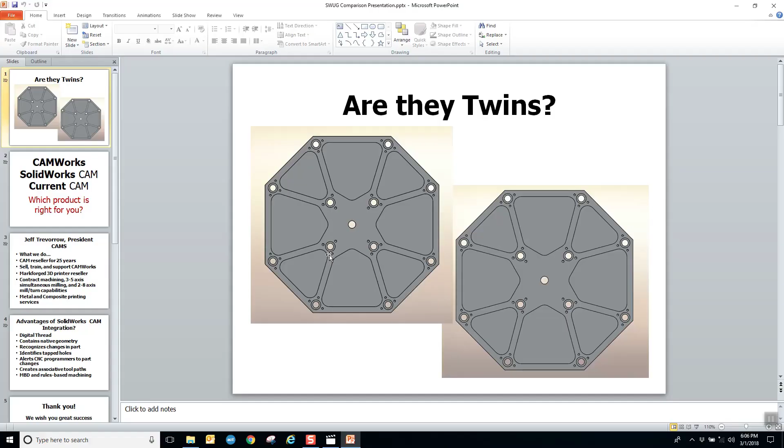All right. Are they twins? So we're going to start with the idea that sometimes things look an awful lot alike in life, and they're not the same. Heard a story over the summer.

A company sent out a part to another company to manufacture, and the part had been changed ever so subtly. These two parts are not the same. One of them has a 15-degree angle. One of them has a 17-degree angle on the pockets here and here. But when the first company made the change, they didn't change the revision number. When the second company got the part, it looked just like the previous part. And so they made the previous part. Over a $10,000 mistake, and both parties split the loss.

But we're going to talk tonight about SOLIDWORKS CAM and CAMWorks, and we're going to talk about the digital thread. And that is the idea that the design intent never leaves the model. Had you made that change to the model, CAMWorks or SOLIDWORKS CAM would have alerted you very quickly and said, hey, your part's changed. Would you like to update your toolpath? And probably would have paid for a couple seats of software, right? With just that one thing.

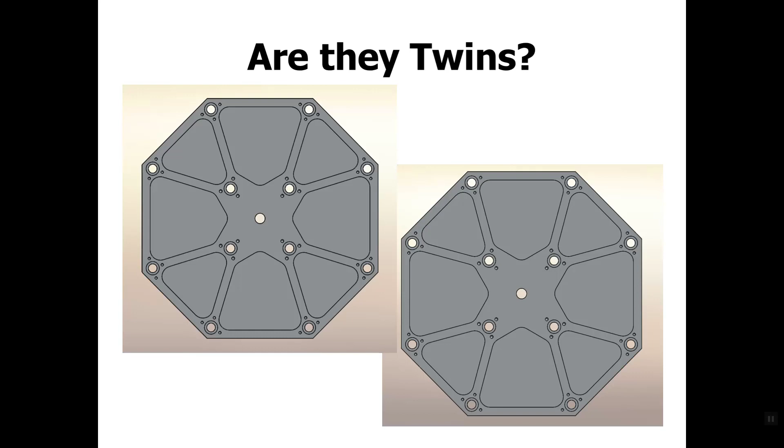So we'll be talking tonight again about CAMWorks, SOLIDWORKS CAM, and your current CAM. I'm not here to convince anybody that drives a Ford to drive a Chevy instead, or anybody that drives a Chevy to drive a Ford. It's really about what tools are best for you guys, and that's what I'm here to talk about.

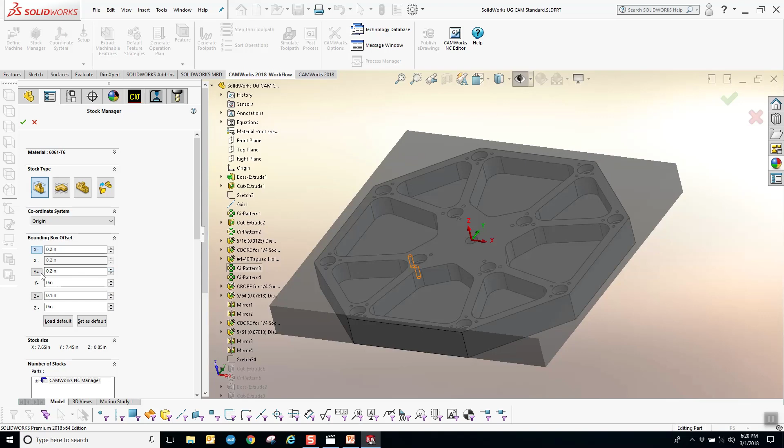So we'll put a little on the top, and then let's put a little on the sides as well. So we got some extra stock in there. Say okay to that. Any of you guys who are machinists, you know that setting our 0 point is going to be really important. So we're going to go in here, and we could use a SOLIDWORKS coordinate system. And you see we've got one in the middle of the part, or we can use a user coordinate system. And we're going to go down here and make a user defined.

And nice thing that SOLIDWORKS actually brought, they said, hey, we like what you've done, but let's make it better. And so they went over here and they said, let's create a coordinate system based on that stock bounding box. And so if you look, you see we got all those little nodes we could grab, and you can grab any one of them and put your 0 point there, or on top, center, or whatever you want to do.

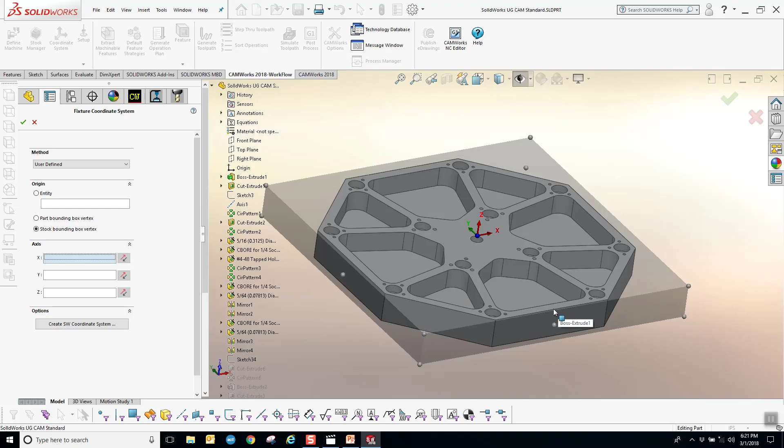And then if you're not happy with the direction or something like that, you can just choose any direction, and it'll set your X along that direction, or set your Y along the next direction, or whatever. So you can grab right off of the model. You can change directions. We could reverse that guy, have him go the other direction or whatever. So let's say okay to that.

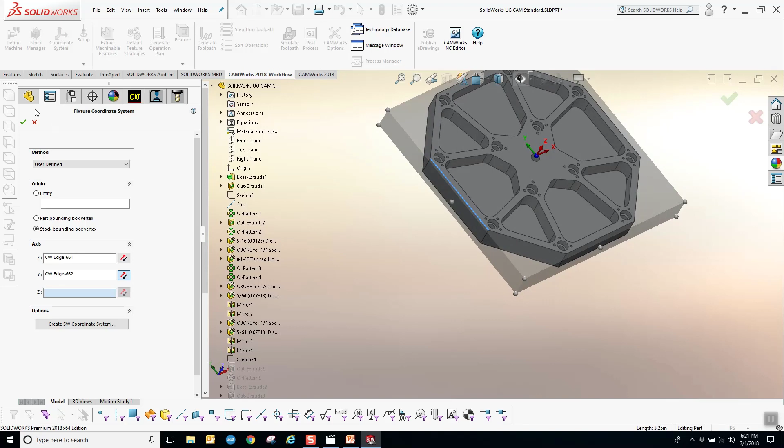And then finally, let's define our machine that we want to cut it on. SOLIDWORKS CAM standard is 2.5 axis milling plus some light 3 axis milling in the part environment only. And so we just go ahead and grab this mill inch, and let's say select and okay to that. Go over here, let's just take this default tool crib or group of tools. We're going to choose the Brian post processor.

So Brian is a guy who works for us. Post processors, who knows what they are? Anybody in here? Who knows that if they're not right, they really stink? All the same people who know what a post processor is. Yeah. Yeah, thank you. Thank you.

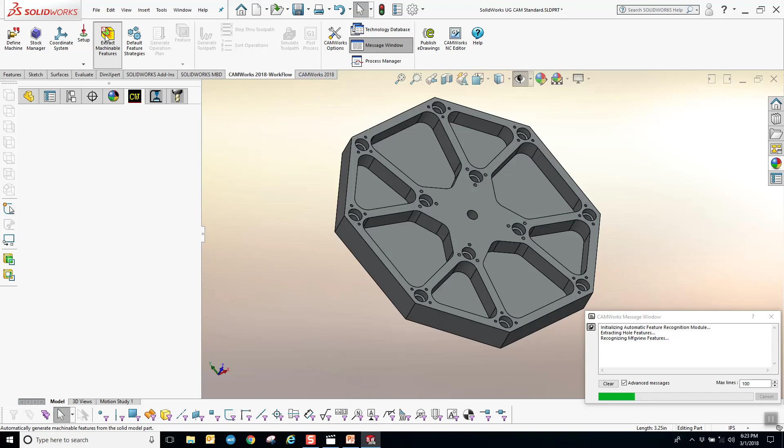And even as I speak now, I know that I got it wrong. I did a little demo for these guys ahead of time, and I was like, I'm going to get this wrong when I go to do it. Because you can turn on your options for the features that are found or not found. It might work because we're in the part mode, not the assembly mode. And it did. So here's what CAMWorks found.

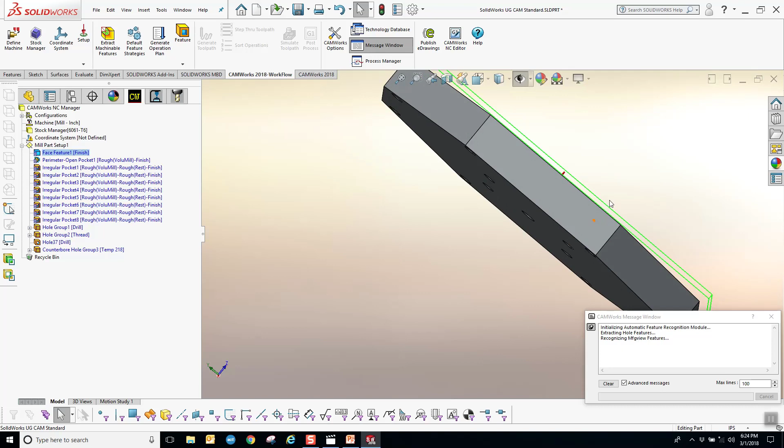It found a face feature. And if you look, it knows where the top of the stock is, knows where the top of the part is. It also knows the extent of the stock. It found a part perimeter feature, and so it knows, once again, where the part is, where the stock is. And we're going to drag that guy down to the bottom. And then it found a whole bunch of pockets, and if we hover over them, you can see them lighting up.

You could tell it to highlight all the recognized features, and they'd all turn blue, or highlight all the unrecognized features. And then it found some holes. And after each of these, you see something in parentheses. So this says rough VoluMill, rough rest, finish. And so you can name your rules anything you want. Like I could make them Jeff 1, Jeff 2, Jeff 3, but after about Jeff 10, I wouldn't remember what they meant. So I try to give them something that's a little bit expressive or that jogs my memory to know what they do.

Every one of you guys who works in a machine shop or runs a machine or anything like that, every company in America has rules. Most people don't capture them. Most people just have the rules, and you know it and you know it, and you have a different set of rules, and you don't care about the rules, and so it's all over the board. This guy's going to run it at 100 inches a minute and this guy's going to run it at 50 inches a minute, and it's all over the board.

And so with rules-based machining, you don't have to conform to them. You can always change them, but we try to give you a starting point. And then every company can refine that starting point: this is how we do pockets. Hey, when we do pockets, we always go in and rough with a big tool. We rest rough with a smaller tool. We finish with a tool, and then we edge break it. That could be a set of rules. But whatever it is, it's just the ability to capture it and apply it over and over again.

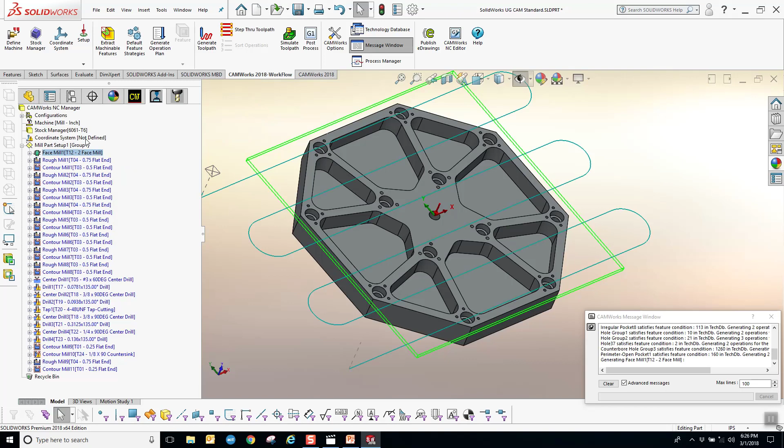Now our operations are blue, and what that tells me is I have no toolpath. So if I go up here, click on that and say generate toolpath, there you get your facing pass across the top and your operation turned black. If I look at my tool tab, here's all the tools that I'm using in black and all the tools I'm not using in blue. So let's just go ahead over here and say generate toolpath for everything.

Now is this generating the toolpath based on your rules predefined already? Yeah, based on that. And you know what? The truth is that I just did something that I didn't intend to do on the SOLIDWORKS standard demo. So you'll see that it says volume mill. Who knows what volume mill is? So a few of you guys. Volume mill, so truth is, I used to tell people this.

If you bought $5,000 CAMWorks, and back then it was about the $1,800 volume mill add-on, you'd be at about $6,800, and I'd say the volume mill can probably pay for the whole system in the first 3 to 6 months. Volume mill is a volumetric, high efficiency, ultra high efficiency roughing algorithm. It's only for roughing. You got to have some RPM and some feed rates on your machine to make it worthwhile. But if you do, then you can expect 2 to 5 times faster roughing cycles. You could expect 3 to 8 times better tool life.

My first customer who bought it made a 65% profit on their first job. He called me up. He's like, I hope you don't sell that to anyone else. And so we did, we sold it to a lot of other people. But that was amazing. And I had another guy buy it recently. He was cutting Inconel, and it was taking him 1 hour to rough the part, and he was getting 1 part per tool. Volume mill, 15 minutes. And he still only got 1 part per tool. I don't know why, but he probably was like, I'm saving enough money, I don't care, I'll put a new tool in there. So it's for real.

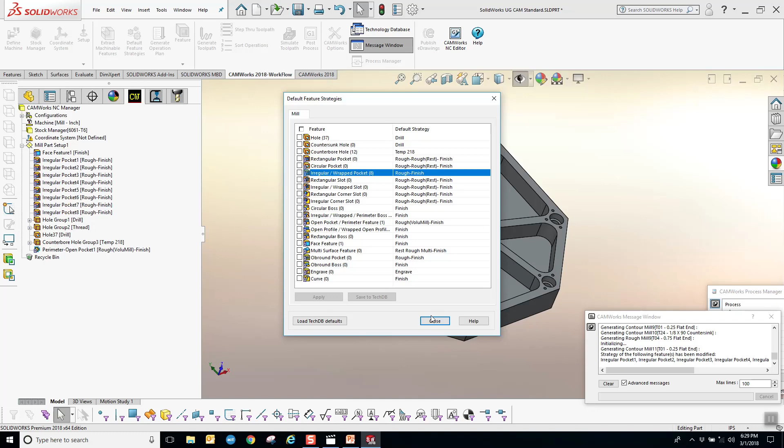What's that? Oh yeah, way better than the old way where you had to go through click, change, click, change. We do learn—it takes us a while, but we do learn.

So let's regenerate our operation plans. We have a choice of updating or regenerating—let's just regenerate everything.

This is the slowest fast computer I've ever owned. So let's go ahead and generate a toolpath for everything.

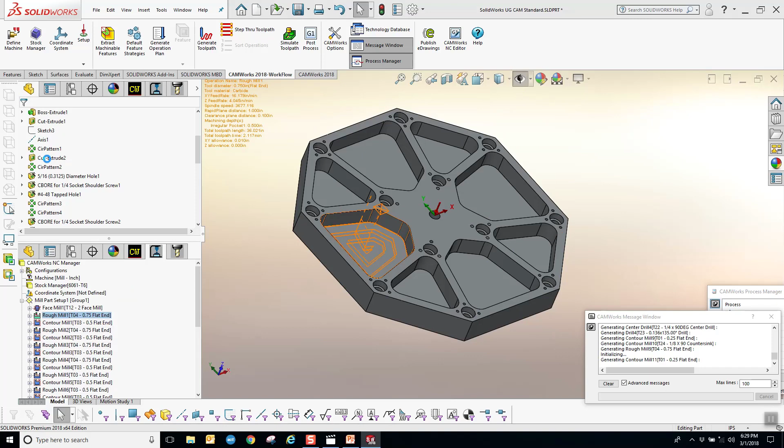Right about now, there should be a whole group of guys going, it's way too automatic—where's the control, right? But you can double click on the operation, and here's all your standard parameters. We could go in and change the tool, grab it from our tool crib, change the holder, change our protrusion amounts, probably change the overall length of that tool.

And I can't stress enough, it's really all the standard questions you're used to with any other CAM system. Feeds and speeds, they can be based on a library that you can set up per operation or per tool.

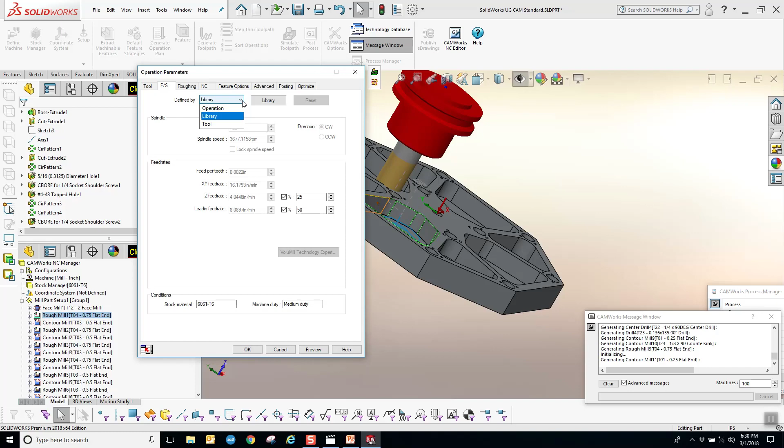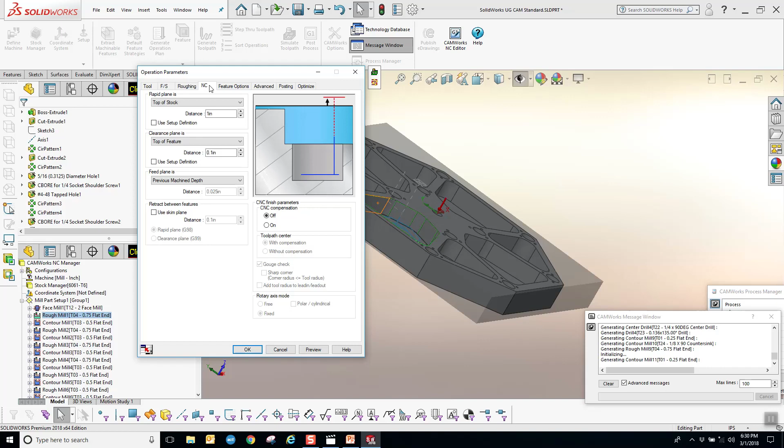Your style of roughing—do you want to pocket in, pocket out, zigzag, spiral in, spiral out, offset roughing, or if you upgrade, volume mill. Then the NC tab: what's your clearance plane, your rapid plane, what are they relative to? It's just all the same things you're used to seeing.

How do you get into the pocket? You know, spiral in, plunge in, entry drill, all kinds of things.

Yes, a quick question for you. In other software, if you don't set your rapid plane higher than say the top of your part, it goes right to the top of your part. Is this because it's a solid and the system knows not to do that?

No. It's because our rules were set up so that we didn't do that. If we had somehow set them up wrong, of course your simulation would show you that and you could get a nice crash—you could pause it, do whatever, probably put a sound on it. But it's because we set the rules up that said rapid planes above the top of the stock, and clearance plane above the top of the feature. You don't have to worry about it, as long as it's true.

So I was at Gentex today and they said we are this close to having all our standard stuff automated—just push a button.

Another one of our customers is PCS Company, a division of Misumi. PCS owns 35 seats of the most popular CAM system in Michigan—most of you probably know what that is. It's a great CAM system, but with 8 programmers, 2 shifts, and 35 seats, their programming time was down to 60 minutes, or 1 hour, per part.

They bought 2 seats of CAMWorks, 2 programmers, and put about 6 months of refinement in because they're really trying to automate their whole system. We even wrote something called a color-based macro—one of the guys from Precision Aerospace wrote it. He's a genius, one of my favorite guys in the world. PCS Company today is down to 15 minutes per part.

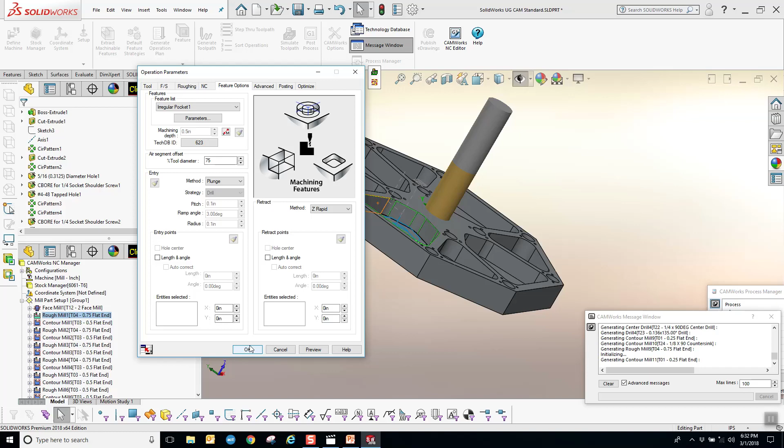So anyway, let's say okay to that, and we'll change that tool for everything that's using it.

Let's go over here and sort our operations. So we could come over here, and if we had indexes, we could sort by and across indexes.

Tim Vandertoorn from Envision—they got a beautiful new Makino horizontal over there. If you guys are looking for some fast horizontal work, they'll do a great job for you. I was asking him today how it's working for him, and he said great.

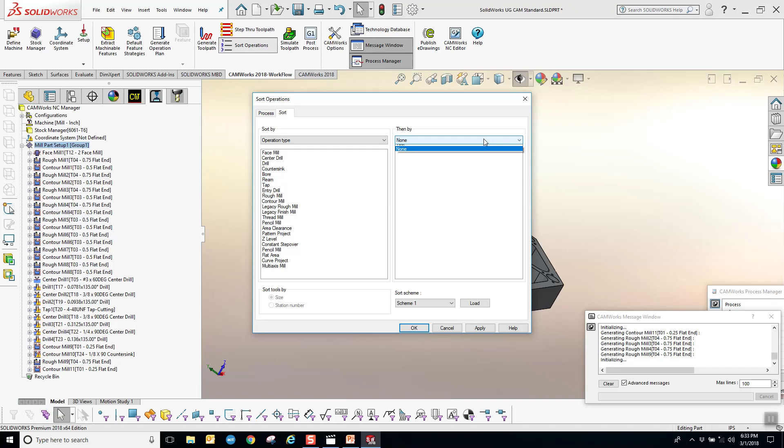You know, for optimization, you can sort by index, sort by tool change, sort across indexes, things like that. And then we can tell it what we want to do first - do we want to do our hole work first, then our milling, or vice versa? We also want to sort it by tool, and we can apply that. If we like it, we can say okay. If we don't like it, we can undo it.

And then you can still drag and drop. So if we want to do our... oh, I forgot to take my volume mill off of that. Sorry, you're going to get to see a little volume mill. Didn't mean for you to.

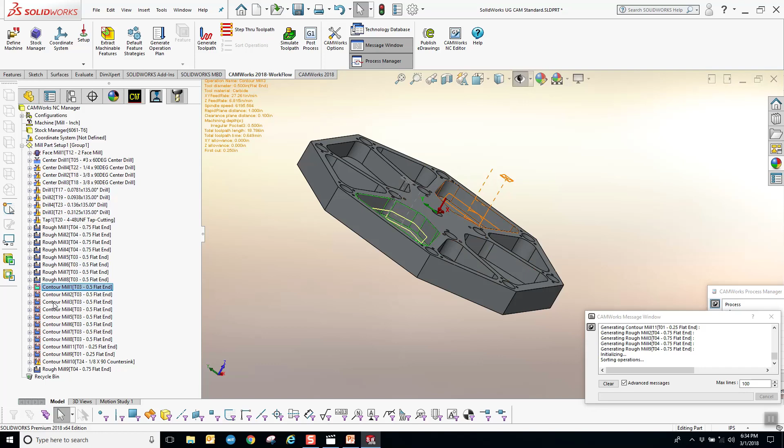And let me find that contour pass, and let's take that guy and drag him down after the rough. Now I can tell already that I'm not going to like this contour pass because the rules in there have defined the depth of cut and things like that, so I know the tool is going to be too small. But let's go ahead and run the simulation first, and then we'll go through that.

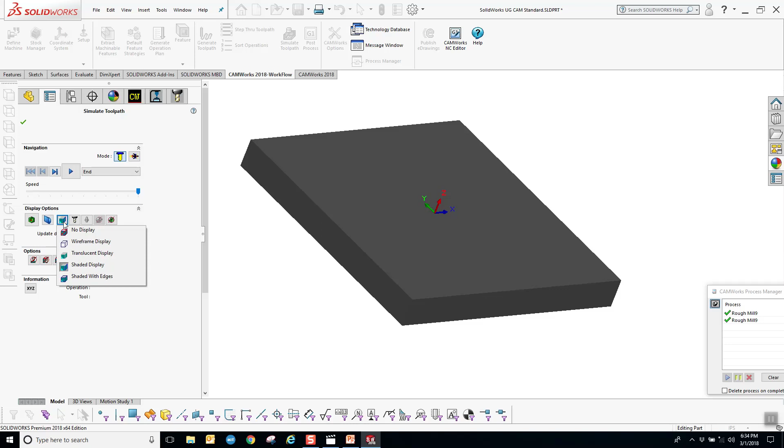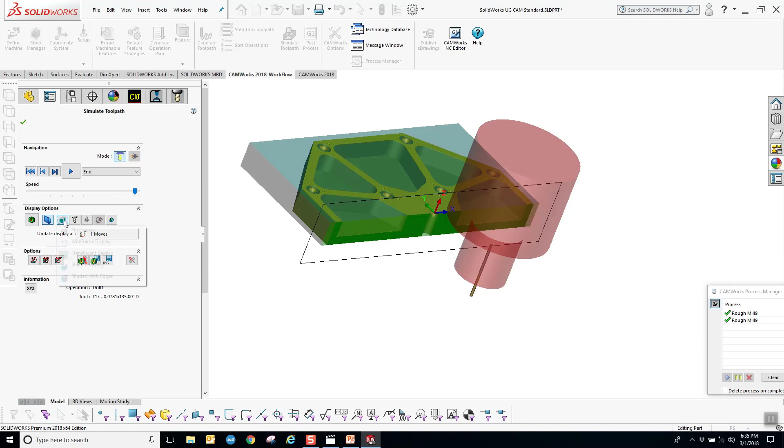So you can make the stock solid or translucent or whatever you want to do. You can show the shaded part underneath if you prefer that. Whatever you want to do. We'll go ahead and slow it down just a touch. When the tool is red, it's doing a rapid move, and when the tool is gold-colored, it's doing a feed move. Now I usually like to show the stock as solid - whoops, I don't want to do that. So we'll turn the part off.

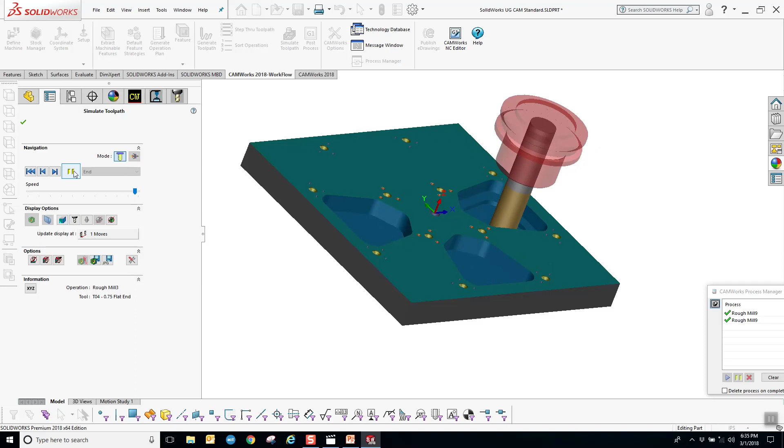And this is more my favorite way to show it. Let's see how we're doing on time. Some of this part had 4-48 tapped holes in there. It automatically saw that with the thread recognition and things like that, so it automatically did that procedure for us.

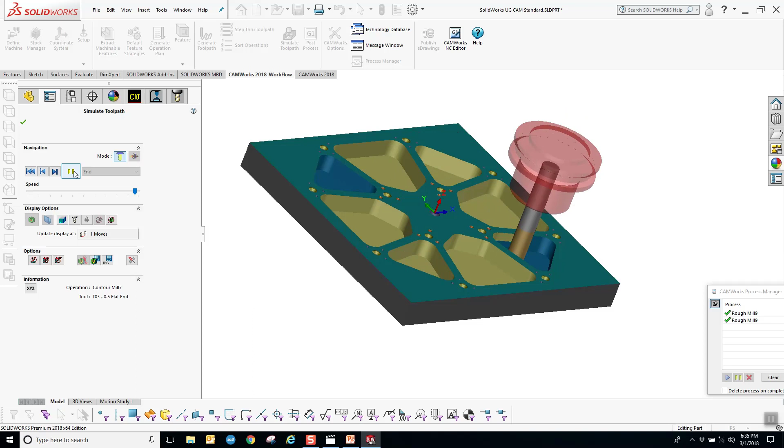And we can combine these operations, so we take like operations - you don't want to have to change 8 operations to do the same thing. So we can combine them, and when you do, it'll automatically sort that flow of cutting too, so you're going from closest to closest.

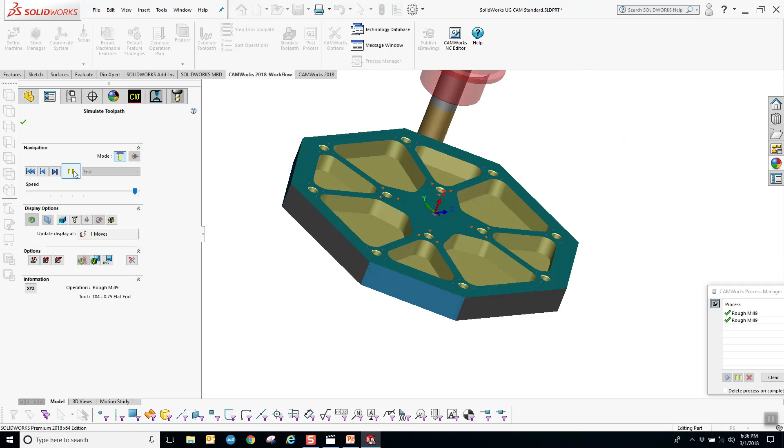Now here's the volume mill. It's doing chip thinning going into the cut, chip thinning coming out of the cut, constantly varying the feed rate in order to keep a constant volume of material removal. And then what it wants to do is a racetrack toolpath like this. And then there's our too small tool - I left it too small for a reason, I wanted you to see it.

So how do you change tools? You could go into the operation and choose the tool that you want, or you could just come over here and say, oh, there's that 1/4-inch tool, I'd really rather use my 1/2-inch tool. So you can grab it and drag it down to your 1/2-inch, it recalculates your tool path, and away you go.

Let's go and combine those operations. Actually, maybe we won't - I'm going to do almost this identical part in the Pro demo, which we're going to do next, so I feel like it's going to be kind of redundant, but I just wanted to show you some of the differences. Let's go ahead and post the code out.

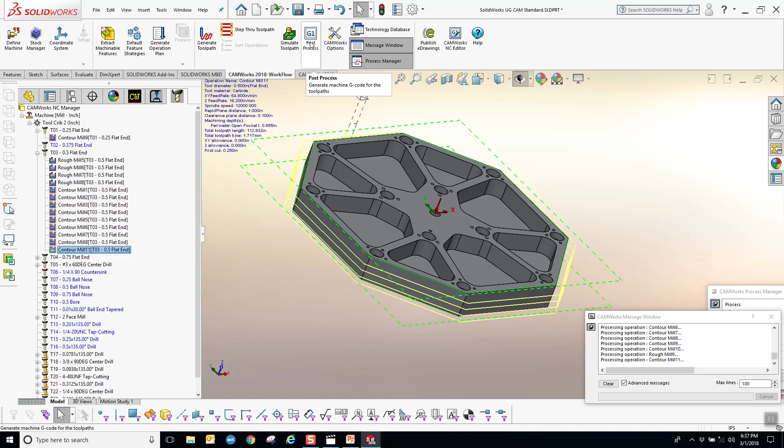Let's put it under G-code, and let's have it run - open up the code in the editor when we're done. And you can have it show the code or not show the code. We'll just let it show the code.

And you can kind of see it scrolling by there. You could also show the moves - that's fun for about half a second, and then you don't want to see it anymore.

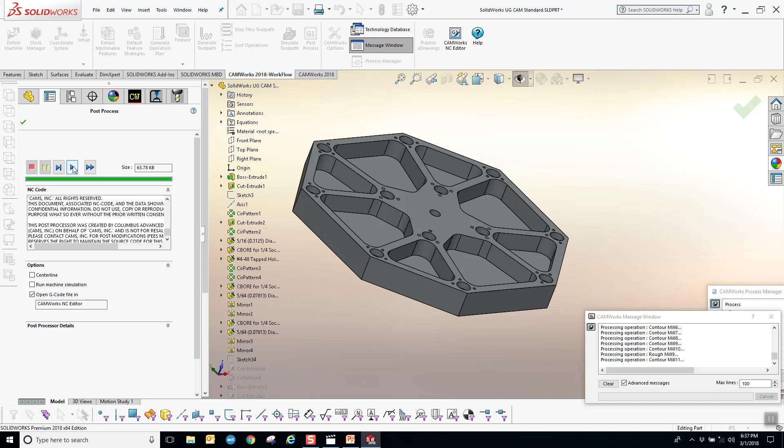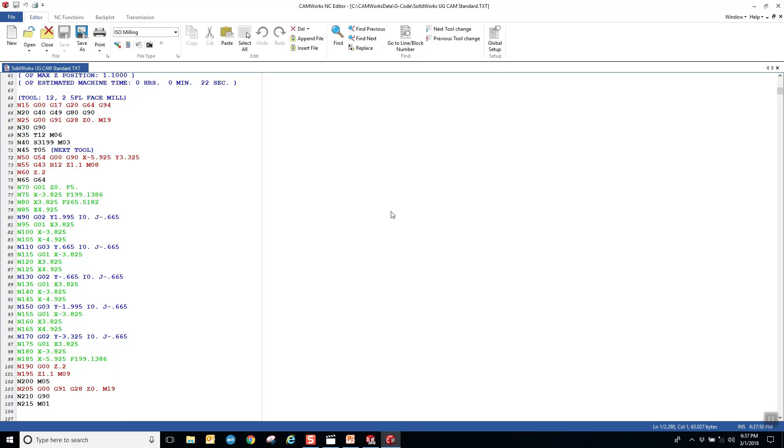And then here's the editor - this is the CIMCO Editor. A lot of you guys have probably seen it, where it shows you the different colors and things like that. It's kind of a light version of it. It's got some backplotting and stuff in it. You can get a pretty inexpensive upgrade - you even see some solid simulation through G-code, which is nice.

Any questions on that so far? When you say the solid simulators, that's like Vericut, basically?

That's a great question. We actually have 3 levels of machine simulation. Most people are doing apt-CL based simulation. We have that - it's great if your post is perfect, and if your post is not perfect, you could still get a crash. We also have G-code level simulation for CAMWorks with our virtual machine, and then just the cut simulation you saw before.

We're also personally carrying the CIMCO line of simulators that are just coming out. Vericut is great software, very expensive - you spend 30 grand in a heartbeat. CIMCO is going to be probably under 3 grand, probably under 2 grand in some cases for true G-code machine simulation. That's unheard of. Ours is more than that.

Is that drawing the whole machine or just your screen? Yeah, you can. They're starting with Heidenhain, I believe, because they're from the Netherlands, and it's very popular in the area. But they're going to do all of them, and they're really bringing the price point down. Same machine models as any of us use - same models I'd use for CAMWorks, for Vericut, for anybody. So the models look the same, then you just got to get the kinematics. It's kind of the reverse post-processor, right?

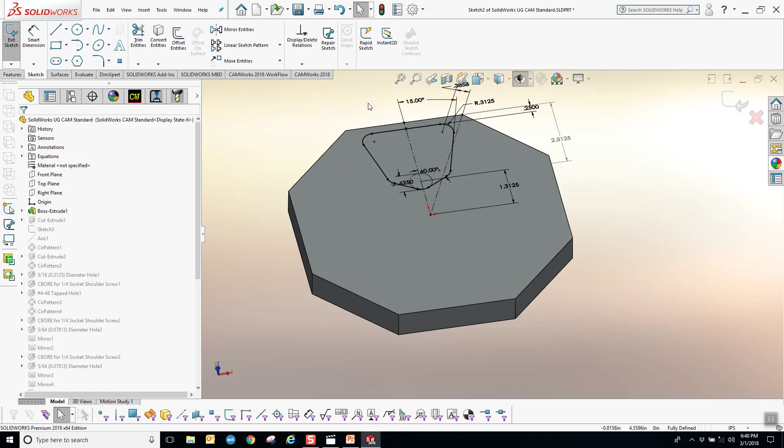Let's go and edit the sketch that was used for this cut pocket. Let's go in here and just change that angle - let's make it a 19-degree angle. So you see it kind of narrow up. Let's exit out of our sketch.

This propagates that change - you can kind of see how these guys got longer. Maybe you can tell that. And this is the magic right here, CAMWorks - you get this message. That's the $12,000 message right there. That is, hey, wait a minute, the part changed. So we say okay, let it go ahead and rebuild.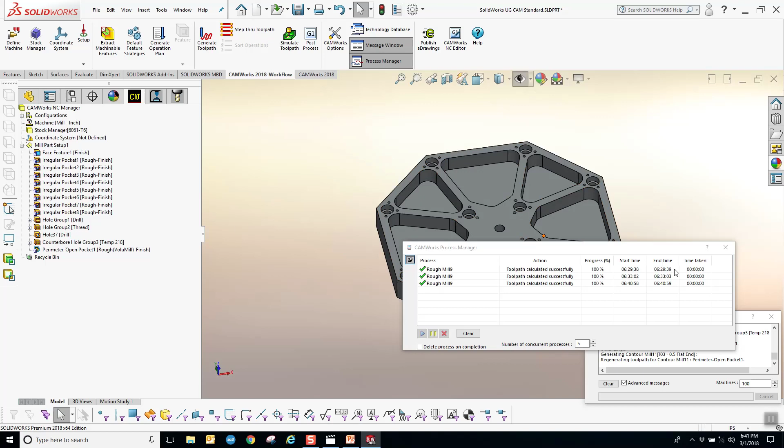I'll show you one other quick thing, we'll run a quick simulation again. This is all standard, right? The only thing that's not in standard is the volume mill outside roughing - I didn't change that back, so let's get rid of it. I'm going to turn this guy off so it doesn't stay up, and get rid of this guy too.

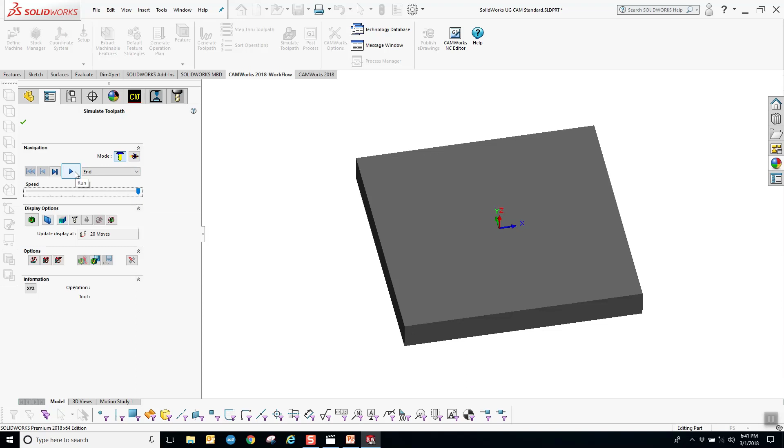Let's go into our simulation. Even in tool mode, we can go here and say, hey, update the stock every, let's say every 20 moves, and then we'll just have it run to the end. Let's set it on full speed. So pretty quick, and then you can do a comparison between the modeled part and the cut part.

Looks like we got a little extra stock left on our counterbore holes we'd want to address, but otherwise our pockets are correct. So it updated the toolpath to correspond with the change in our pocket.

Can you put in your post toolware, you need to just rerun a pocket or whatever? Yeah, so if you're talking about probing, that's something we have a little bit today, more coming. If you were talking about probing a pocket and then rerunning based on the probe data, that's not something we could probably do today. I mean, we could - I just bought machines and bought Renishaw probes for all of them, and bought the Renishaw software. So we're going to figure out what's the best way to integrate that with what we have today.

But CAMWorks is also working on this - the truth is some of you guys have probing routines in your CAM software today, and when you go into the probing routine, it's like you just went into a whole new house, right? No, but what I'm saying is, let's say I measure that pocket and it's supposed to be a 3/8 counterbore, plus or minus .001.

Can I rerun just that toolpath while it's already posted to the machine to get my tool to fit, or do I have to go back into the post and line up my tool or whatever I have to do to get it to fit? Well, that's more a machine tool thing, right? Because if you have the probing, you had the machine go probe it, and then it found that it's undersized. If you're oversized, you're done, right? But they found it's undersized, so I have to run it again.

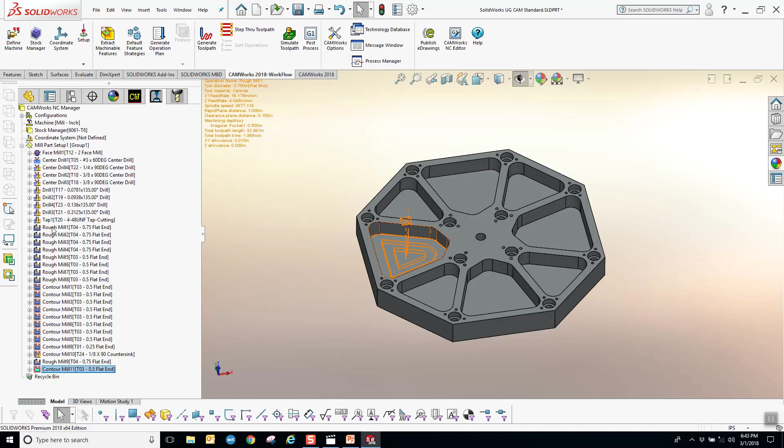If I had 40 programs posted out, can I go to tool 20, operation pocket 1 or whatever, and just rerun that pocket? If it's already posted, can I just rerun that? Can I go right in my post right now, go T20, and just comp my wear myself manually and rerun that? Depends on your machine controls. But some posts don't read wear.

Well, normally for us, it's more on the machine side at that point. We just did a Roeders post. You guys know the Roeders machine? That machine checks the wear and it substitutes out the tool. If your half-inch tool's got too much wear on it, it'll just put the next half-inch tool in and rerun. Yes, we have that for the Roeders.

Even for a regular Haas or whatever, it's not for tool wear. I don't know how tool wear is posted out. Well, it doesn't post tool wear, so we're going to give you your comps. We'll put out your cutter comp. It turns cutter comp on or off, so the comp of the machine does it for you. And we'll call it whatever comp register number you want.

We can work with you on it. I think we're close. We're just running a lot of stainless. If it's a long run, we may have to run that one pocket 2 or 3 times, and we don't want to change the tool because it's still good enough. Being able to comp that tool 2 or 3 thousandths in the machine and run it again. And I just don't remember the post for tool wear or cutter comp.

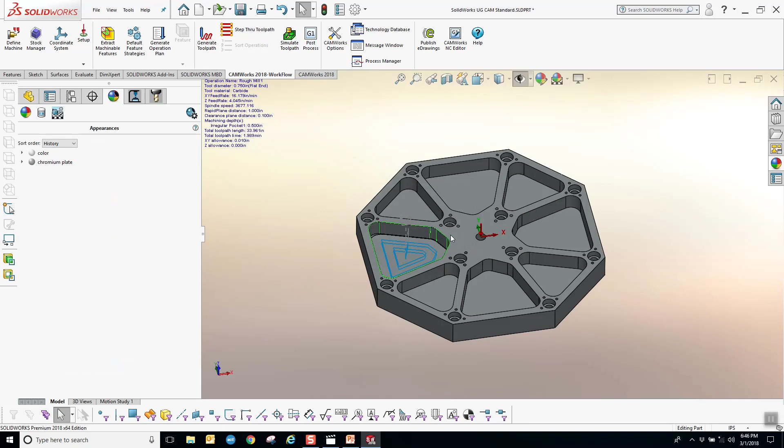I've got about 450 customers and thousands of machine tools that we're running, so I feel comfortable that we can help you get what you need. All right, let's look at this part. What would the differences be if we went into Pro? I'm going to keep the same part just so it keeps some familiarity, but let's grab it in the assembly environment.

So in the assembly environment, we've got a whole bunch of solid models in here. Let's just move real quickly through that part programming process again, because I want to show you guys just a couple other things before I'm done. Let's go. We'll do a new configuration on this guy. And so the first thing we'd do is we'd come in here and we'd say manage parts. And so we'd want to let the system know what's a part and what's not a part, right?

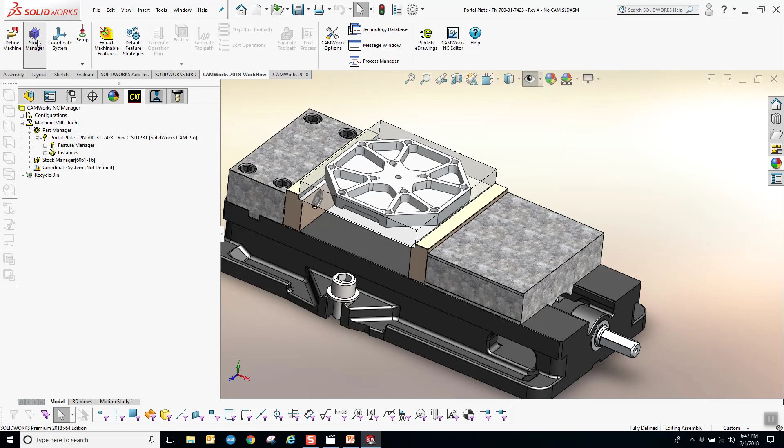And then the next thing we're going to do is we're going to go define our stock. And in this case, we'll just choose another solid model. So we choose that guy and it maps the stock out onto that piece. So we'll say okay to that. Let's look at our rules real quick here.

So for our CAMWorks options on our features, we're going to look for holes, non-holes, bosses, face features, part perimeter features. And when we find a part perimeter, we're going to treat it as an open pocket, which means it's going to machine all the material away rather than just cut around it. And we're going to say anything up to 1.25 inches can be drilled. Anything over 1.25 inches we want to mill.

And let's say that we have to have 91 degrees of an arc before we treat it as a hole. And then we're going to condense split holes. So if we have a hole that is collinear or whatever, that goes here but has a break here and goes here, we're going to drill that all as one hole, and we'll recognize it that way. I think that should be good. So let's say okay to that.

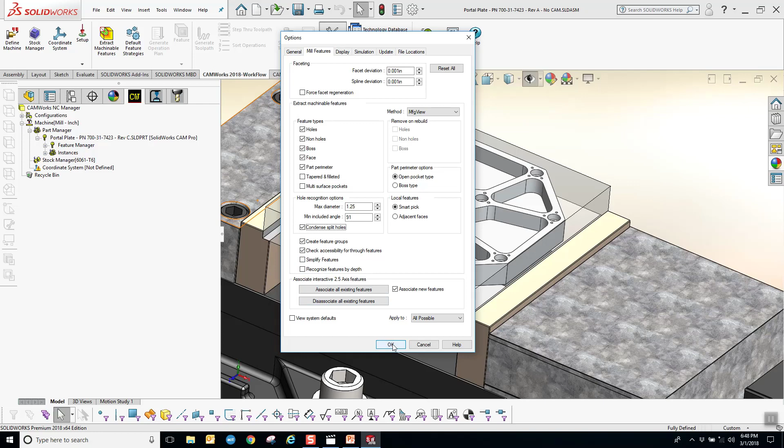And let's go over here. Let's create our coordinate system. And let's put it based on the stock. Let's put it right there. Let's make our x-axis along this edge here. And let's make our y-axis along this edge here. Let's reverse that guy. Or actually, let's reverse this guy, rather. There we go. Say okay to that.

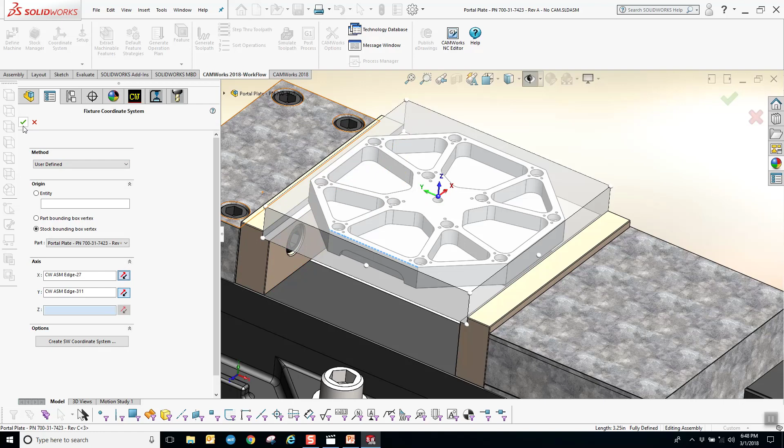And once again, I want to stress that you can use the CAMWorks, SOLIDWORKS CAM coordinate systems, or you can use your SOLIDWORKS coordinate systems, either one. And let's go into our machining environment. This time we're going to take our 5-axis mill. So let's select that guy. Let's go over here. We'll take that same tool crib. Let's go over here and take our 5-axis post.

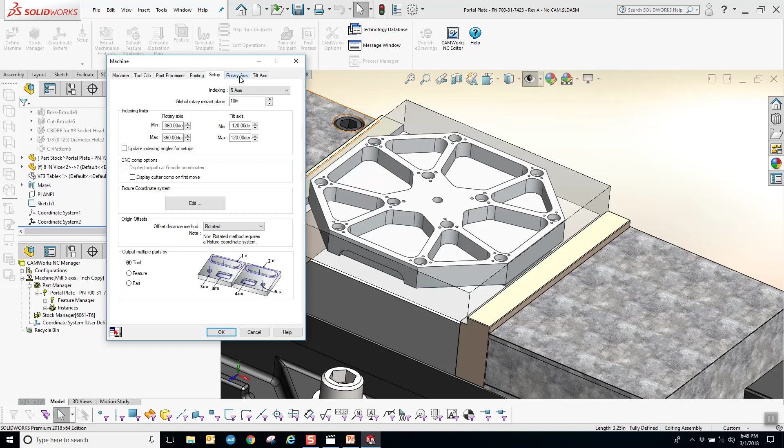And let's make sure that we've got our 5-axis mill, and we're saying that we can rotate 360 degrees, we can tilt plus or minus 120, and you can set those limits up for your own machine. And we're going to be rotating about Z. And on this machine, we're going to use a head table machine. So like some of the Moris or the Hurcos have them, where the head swings. So let's go about our Y-axis, and let's reverse that direction, and let's say okay to that.

And then the system is smart enough to know that when we extract the machinable features, it's going to give us the things that are accessible. And so let's go ahead and we'll say extract machinable features. I'm going to try to go really fast on this because there are a few other things I want to show you guys, and we only have about 10 minutes left. So let's drag that guy down last.

Here on the side, we found a face feature, and I don't really want to use the face feature, so I'm going to delete that guy out of there. We found a part perimeter feature. I don't want to use that. You can also control select the things you don't want to keep, hit the delete button, get rid of them.

And normally I would come in here and I'd kind of rough off this material and I'd create a feature, but I think we're going to run out of time for doing that, so I may just let it go by itself. It'll look a little funky, but you'll get the idea. And so let's go ahead and generate operation plans for everything. And let's go ahead and generate toolpath for everything.

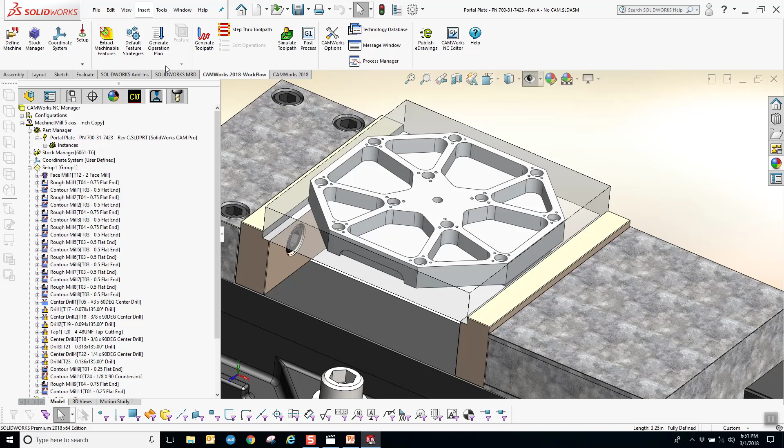Now, I'm going to go ahead and I'm going to sort operations real quickly. And then I'm also going to condense. So I've got, here's my outside rough, and then here's all my different pockets. And you can see it's rough mill 1 down through rough mill 8. So I'm going to shift select these guys, right click, and I'm going to pick combine operations. And I'm just going to say okay.

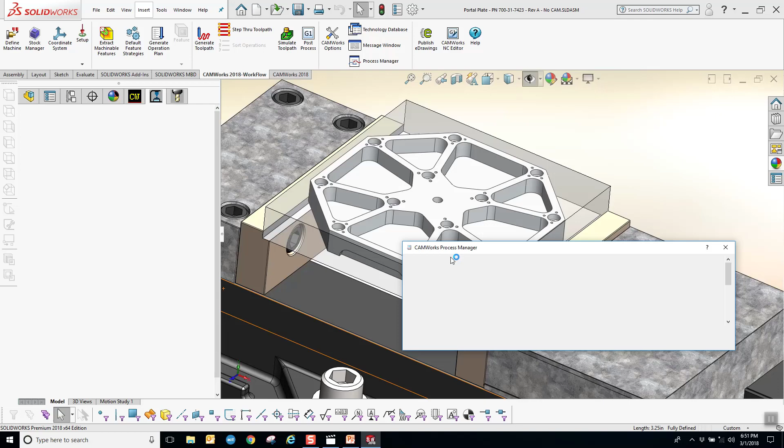And so that condenses us down into one roughing pass. Oh, you know what we did too? I'm sorry, that's my fault. I didn't pick by tool, but I want to change the tool anyway. I've got this 3/4 tool over here, and what I really want to do is run a 1/2-inch tool with my VoluMill.

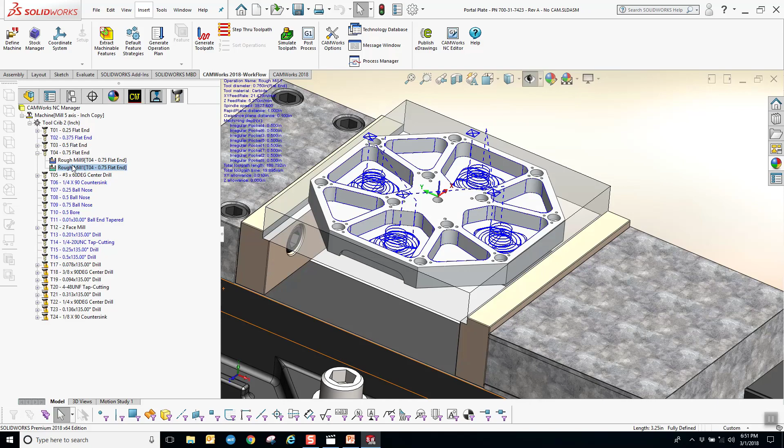One of the things that's nice about VoluMill is you're always trying to achieve at least a 2-to-1 depth to diameter ratio. So if I'm using a 1/2 inch, I'd like to go 1 inch deep. If I'm using a 1/4, I'd like to go 1/2. But I've seen guys go 6-8 times diameter. And you know what the weak link becomes? Your holder. It's trying to pull the tool out of the holder because you have so much flute engagement.

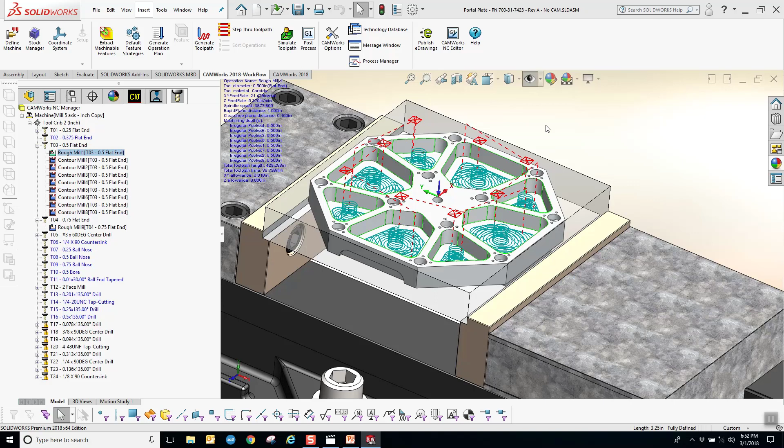But the great thing about smaller diameter tools, heck, a lot cheaper. You start buying 5/8 and larger carbide tools and it gets a little pricey, right? So we got that guy. Let's drag this guy up here too. And you'll see that VoluMill is actually recalculating. Now, we are cutting into our vise, and there's a couple ways we could get around that.

You guys ever hear the saying, slow is fast? So right now I'm trying to go fast and I'm going slow. So I should be going slow and then I'd be going fast.

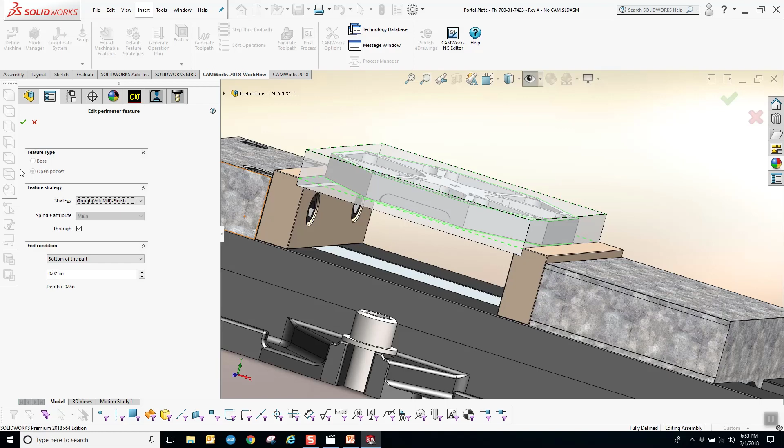Yep, but if we go to this part perimeter feature, we can modify it and say, hey, instead of going clear down to the bottom of the stock, I just want to go down to the bottom of the part. And then you could put an offset in there. So we could say 0.025 to go past the bottom of the part just a little. And we could say okay to that, and come back over here and, hey, look at that. It's nicely changed. We might still be just a little too low, it looks like. It'll be fine.

Well, it'll be fine for the demo, right? I really enjoy that comment. That was awesome.

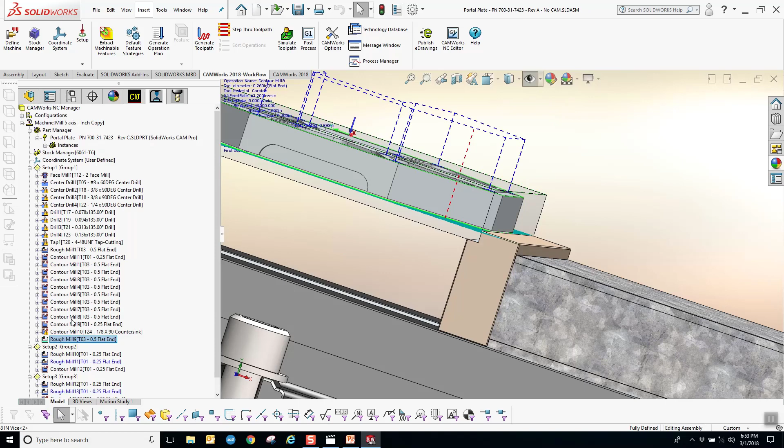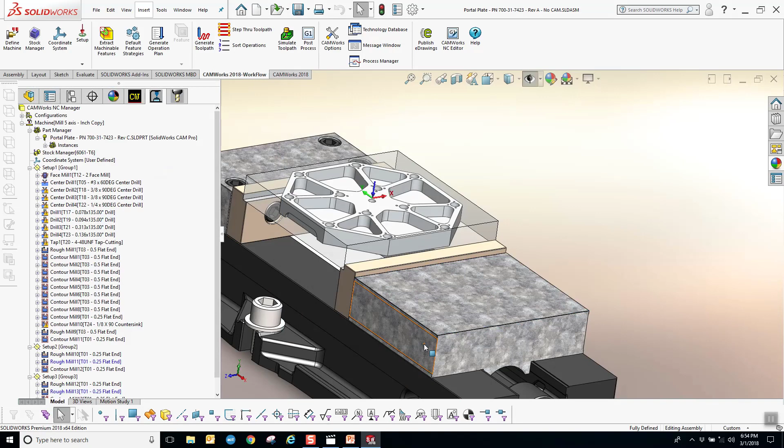Yeah. Anyway, and we got some toolpath on the other side. We're going to be flying right through the stock on the other side. Normally I'd clear it away, but I want to show you a couple other things. We're running low on time, so let's do this. Let's go into our setup, and let's let it know where the vise is. Say okay to that. Go into our simulation.

And for those of you guys who are not familiar with the VoluMill toolpath, one of the things I'm really trying to highlight here is that. And so we're going to run to the next operation. We're going to slow it down. We're going to have it update the stock every move. So there's our facing tool.

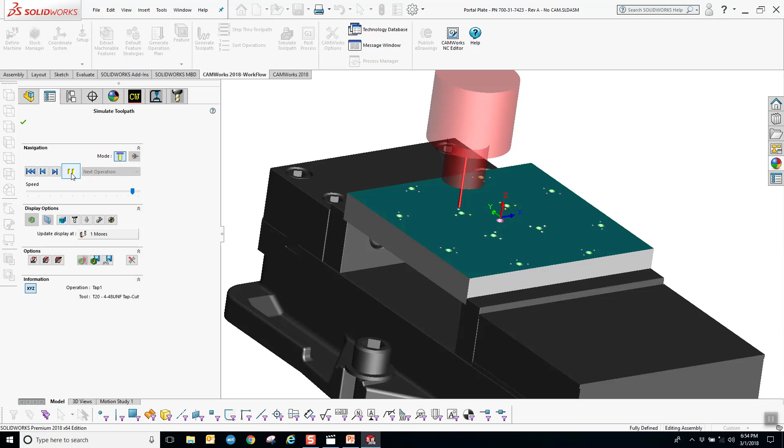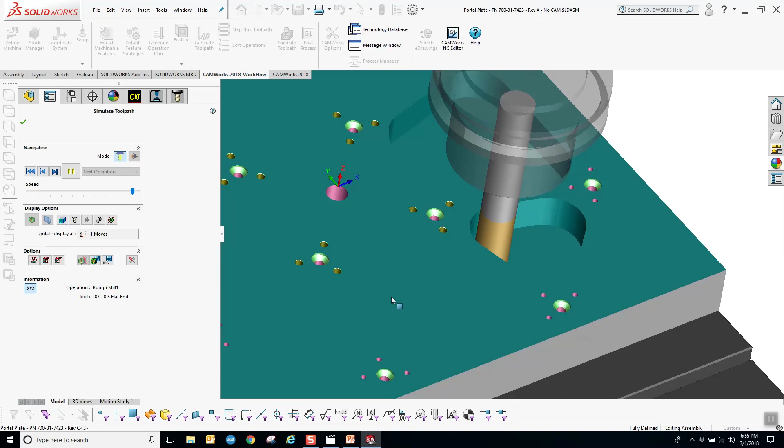All right, so with volume mill, you could do an entry hole or you can spiral a ramp, but you can see it's gradually spiraling its way out until it can no longer do that, and then it's scalloping out the material. And it looks like it's staying at depth, but it's not. It's doing a floor clearance move when it comes up, goes back to the cutting position. So it's actually in its cut, arcs out, ramps up, does a high feed move, and then arcs back down into the cut, goes through the cut.

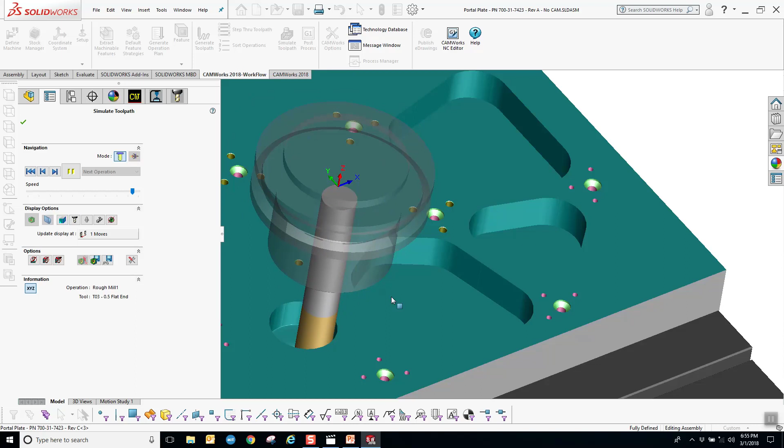Those of you guys who have run it, I've had guys cutting D2 tool steels, and the guy next to him thinks they're cutting aluminum. It just sounds so good. You never hear that heavy buried sound in the corners. It's a beautiful thing.

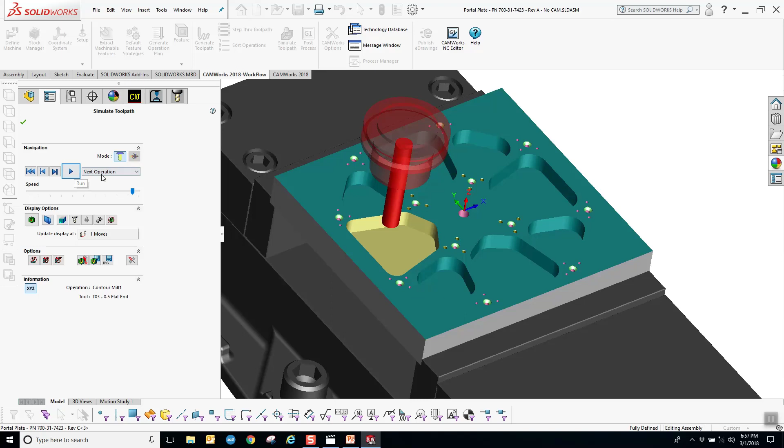I've got 2 kids in college, trying to pay the bills, and getting tight. So anyway, but they really gave you a lot of value.

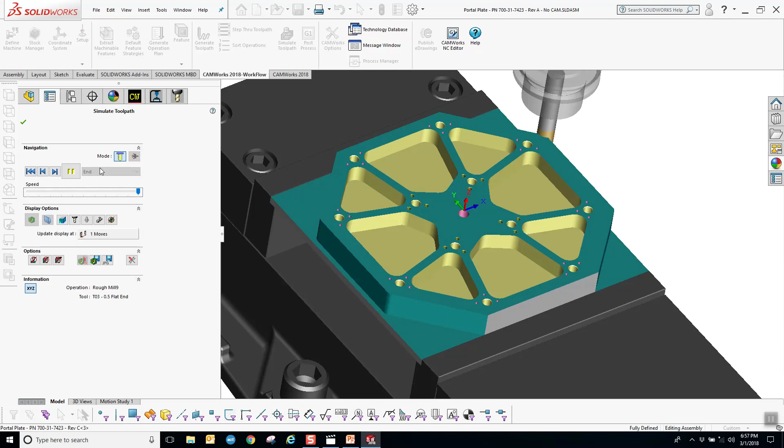And so it knows that this jaw was there and it wouldn't have cut the jaw anyhow, right? Yeah, avoid it. Yes. It missed, it's fine. What's that? It doesn't look like it cut it. We're alright. We're close. Definitely went under. Yeah. That was probably, I probably fat fingered it on my part.

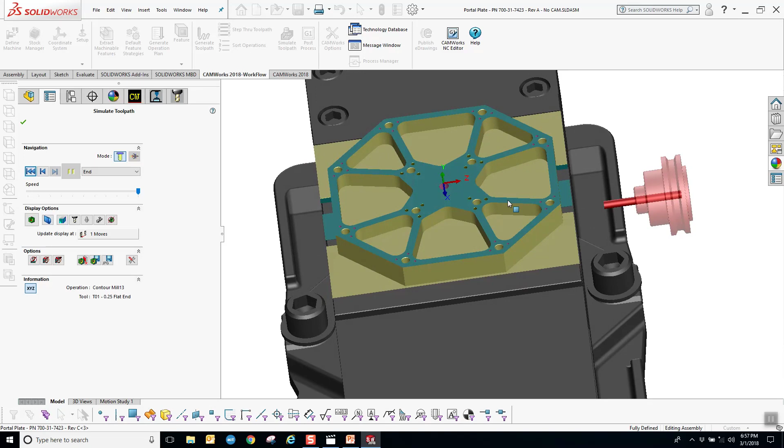But anyway, we get the index moves in there as well, and then the package CAMWorks is actually available clear up through 5-axis simultaneous. So we don't really have time to run through the programming. You could really literally program this guy up in about 15 minutes. But we've got a multi-surface feature here that's got all the different features. I had a certain rule that kind of generates one of everything.

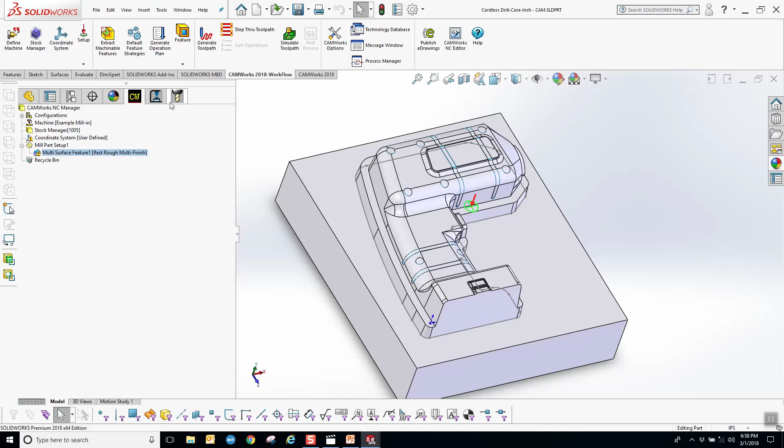So I've got some volume mill toolpath. This is 3-axis volume mill. That is still an additional upgrade. And then there's some other toolpaths in here. So you can see we've got a volume mill rough. We got a rest rough that just finds the remaining material.

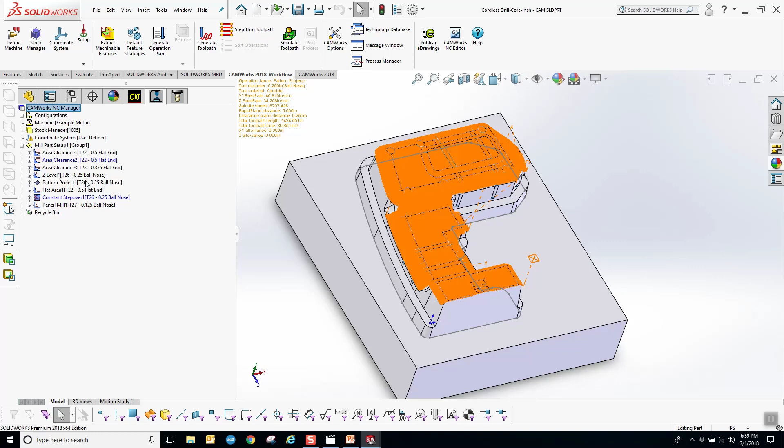We got a Z-level finish that's based on slope. We've got a pattern project, once again based on slope, could also be based on contains. We've got a flat area finish that's looking for the flats, and then we got pencil mill coming in here, maybe going a little deep on some of those guys. Let's run through it real quickly.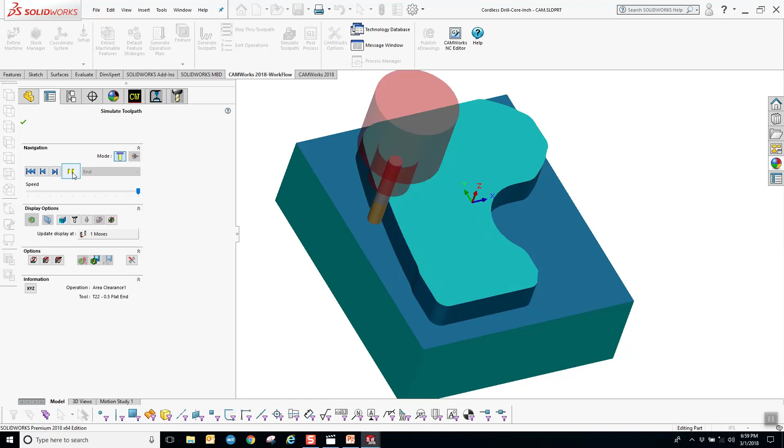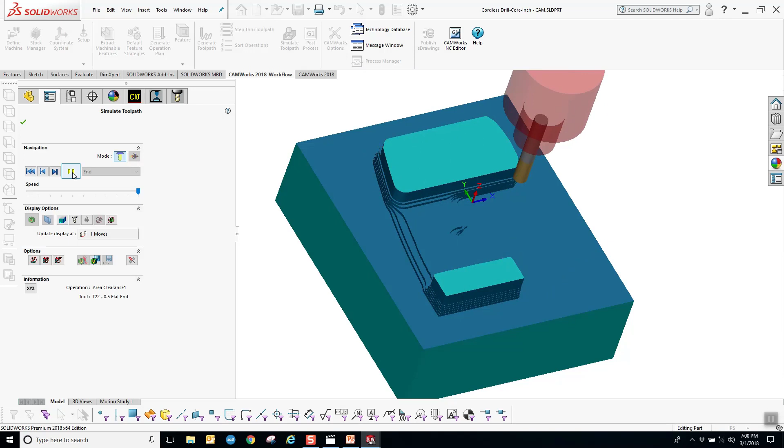And by the way, I did actually bring some stuff here today. Here's that same part. Cut it at a machine tool open house. You guys can pass that around if you like. And so volume mill goes to full depth and then it steps up. And so then we're going to come back with our rest roughing and we're going to knock down those steps a little bit.

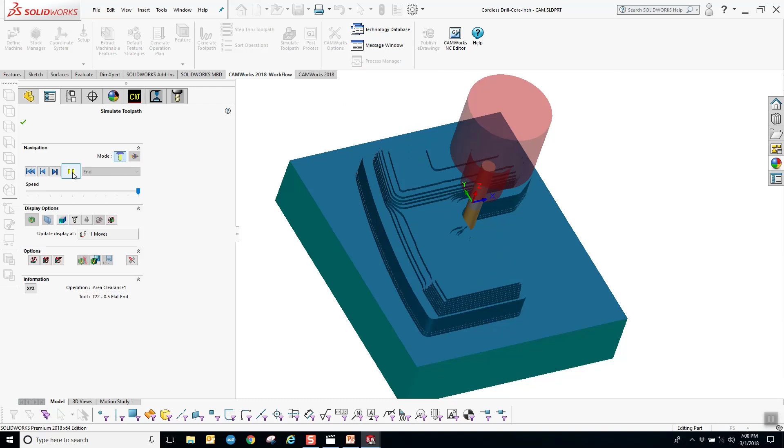How long did it take to do this? Out of aluminum, not very darn long. Yeah, the volume mill actually could have roughed it all out in under 5 minutes. We had to slow it down so people could see it, because otherwise not everyone could even get a look at it. And chips were flying.

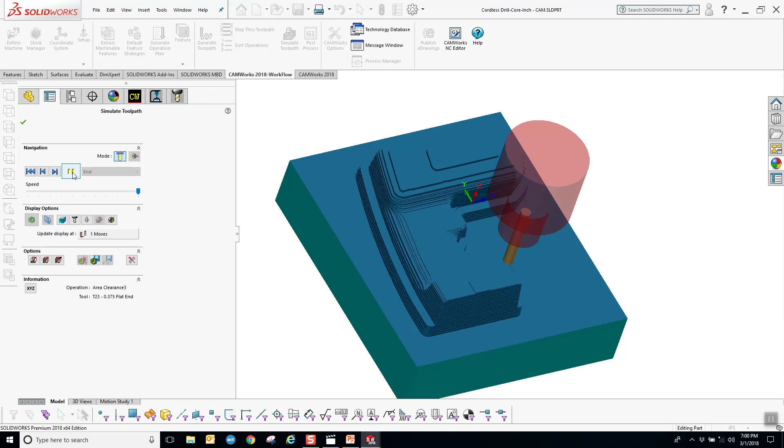But I'll tell you, I've been in the business for 25 years, as I said. There's only about 5 really big game changers during that whole time. The first one was Windows NT, because any of you guys old enough know that you had Unix and you had DOS, and there was nothing in between. And so then Windows NT brought the high-end guys down, the low-end guys up, and gave you the common platform. Best thing that ever could happen for design and manufacturing software.

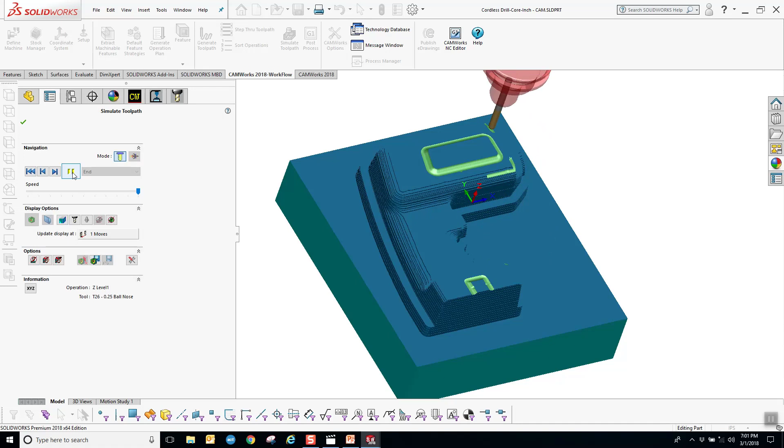But there were a few other things. We went from machining surfaces to faceted data, got a lot faster, a lot more reliable. That was another huge change. But volume mill, it is a game changer. And if you're not running it and you have the RPM and you have the feed rate, man, worth looking into. So let's speed this guy up a little bit. Actually, there's like a turbo mode. So if we back it up, put it in turbo mode.

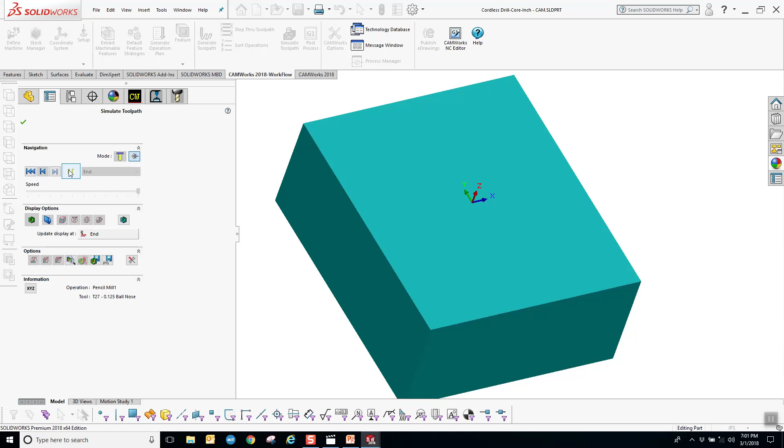So this would be CAMWorks functionality. You do also get the turning, and the turning works very well also, pretty quick and easy. The turning, do you get live tooling? Yeah, well, the live tooling would be CAMWorks. So for SOLIDWORKS CAM, it's 2-axis turning. But then CAMWorks takes it from 2-axis to mill turn to subspindles, upper and lower turrets. We can do 2-channel synchronization.

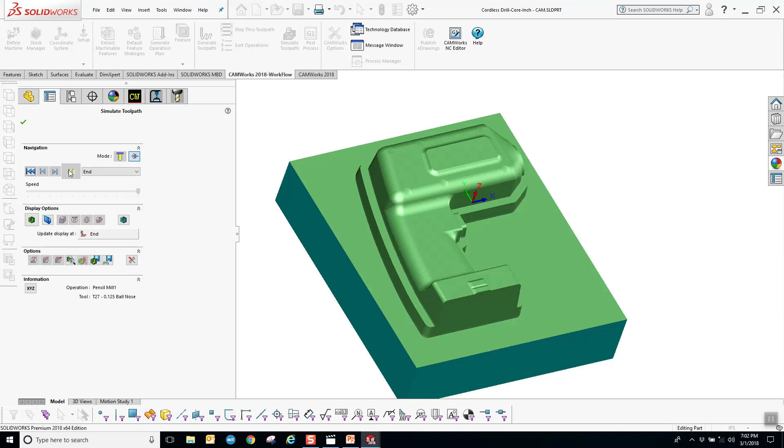So we personally just bought an 8-axis lathe. So we got main spindle, subspindle, C and Y axis on a single turret. Your handoffs are synced pretty good? Yeah, so we've got a subspindle manager, and it has a nice graphical display of coming in, grabbing the part, pulling it back, and you can see which chuck is active. You can set every command you need for that.